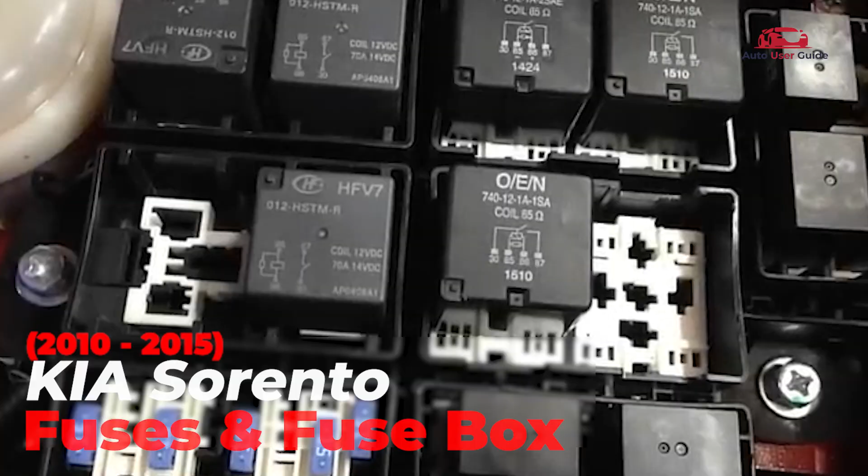Are you trying to locate the fuse box in your Kia Sorento 2010 to 2015? In this video, we're checking out all the fuse boxes from the engine compartment to the cabin area. I'll show you where they're located and explain how they keep your SUV electrical system safe and running smoothly.

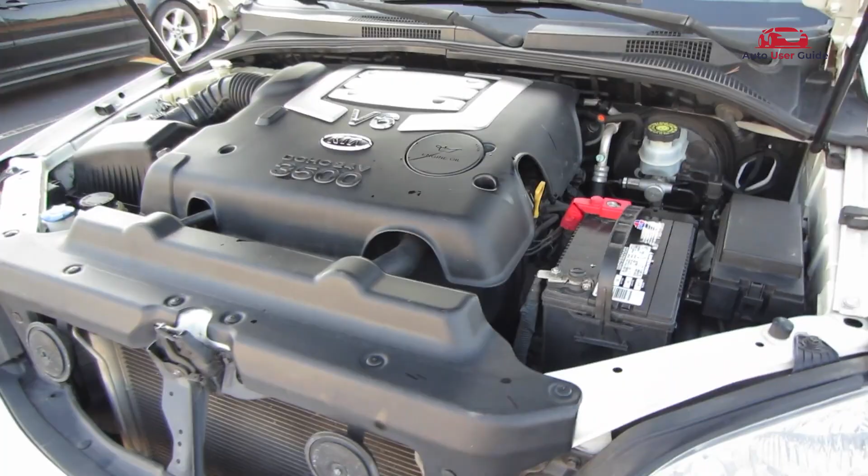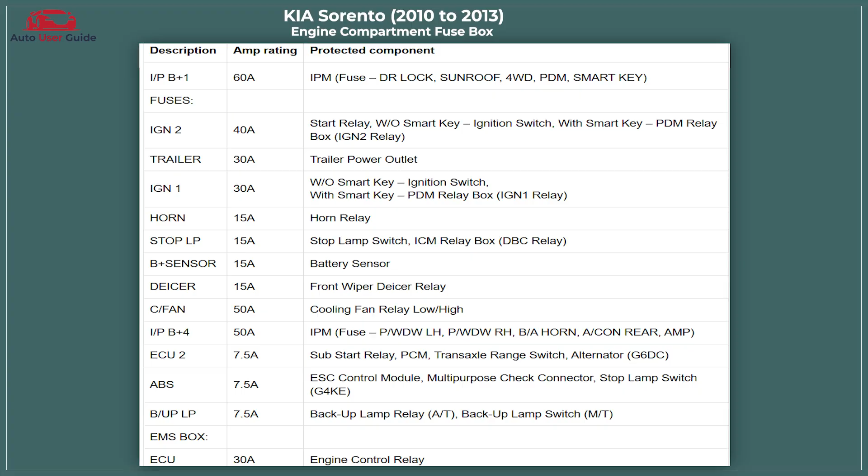Engine compartment fuse box. The engine compartment fuse box in the Kia Sorento 2010 to 2013 contains high amperage multi-fuses and standard fuses that protect vital systems like the alternator, ABS, ECU, cooling fans, and headlights.

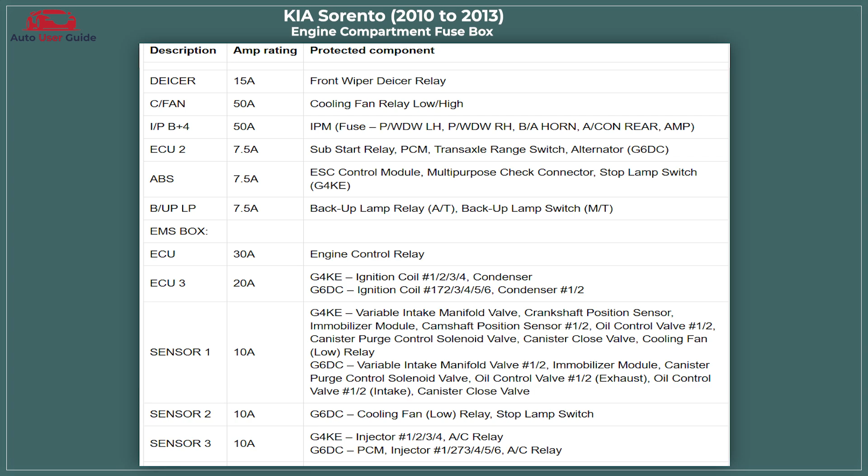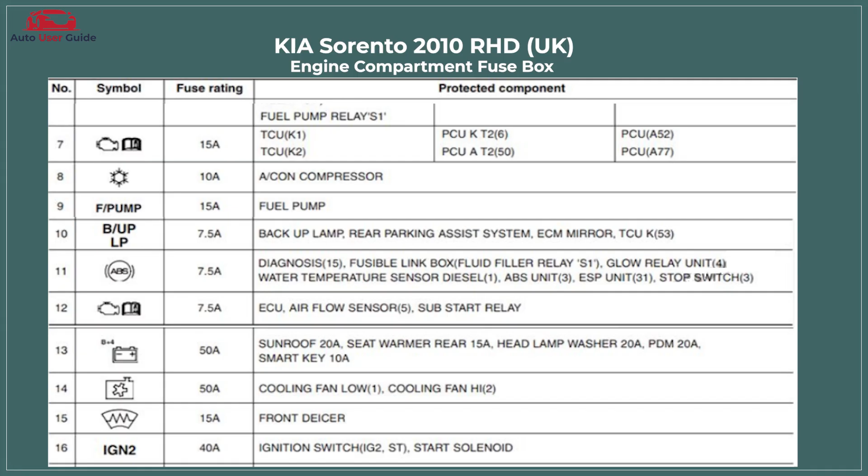In the 2010 Kia Sorento RHD UK model, the engine compartment fuse box houses multi-fuses and standard fuses that safeguard essential systems such as the alternator, ABS, ECU, cooling fans, and headlights.

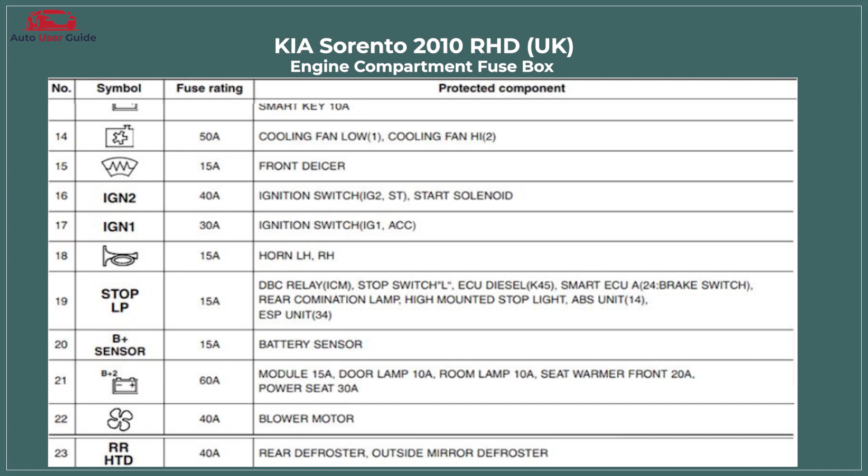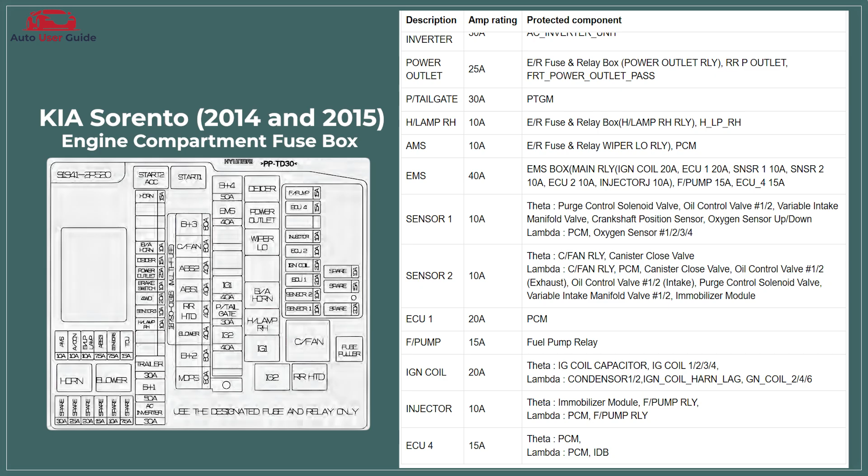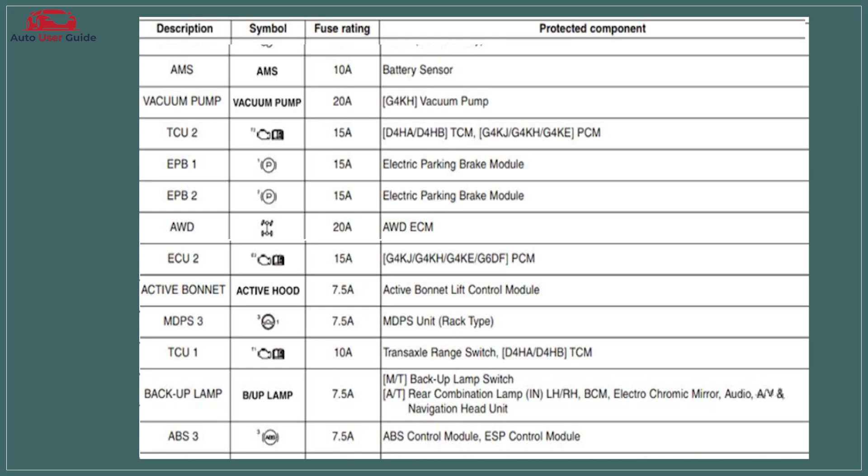In the 2015 Kia Sorento RHD UK model, the engine compartment fuse box contains multi-fuses and standard fuses that protect critical systems such as the alternator, ABS, ECU, cooling fans, and headlights.

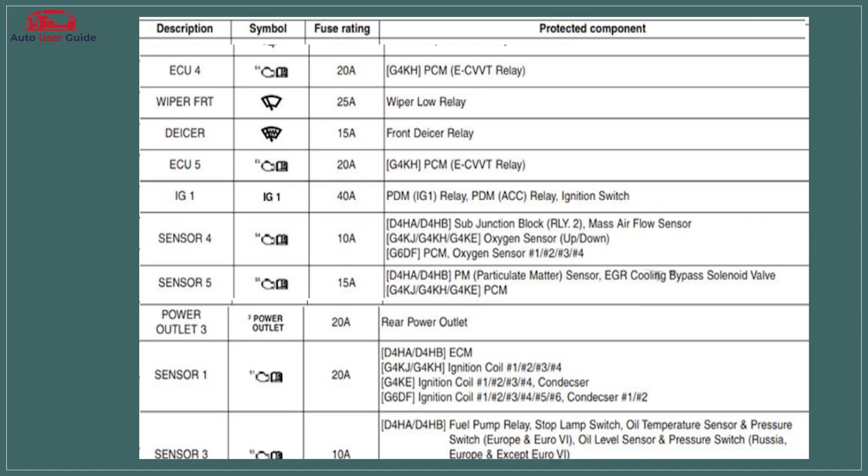In models with a diesel engine, the engine compartment fuse box is equipped with dedicated multi-fuses and standard fuses that safeguard components specific to diesel operation, such as the glow plug system, fuel heater, ECU, ABS, and cooling fans.

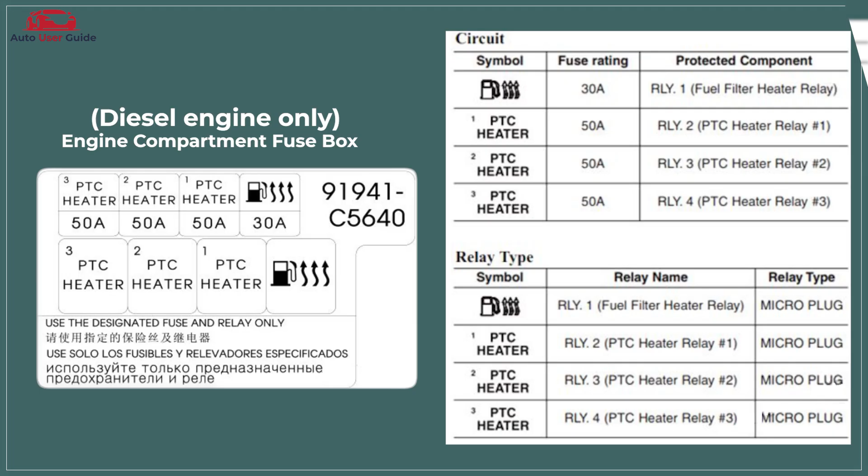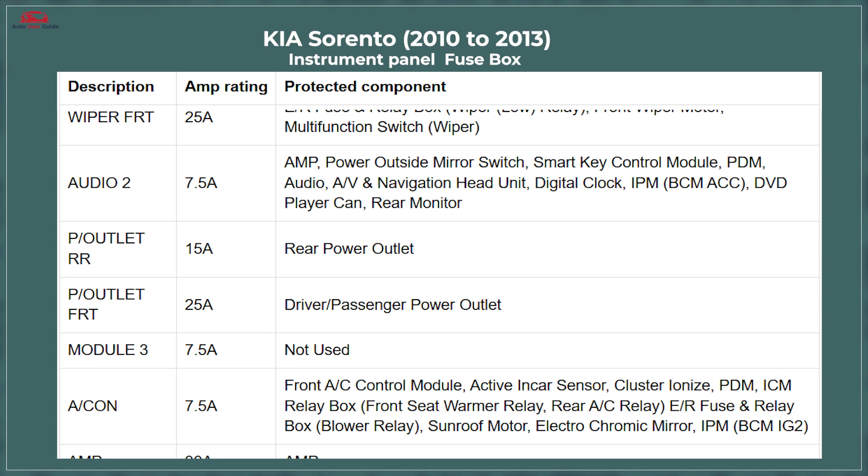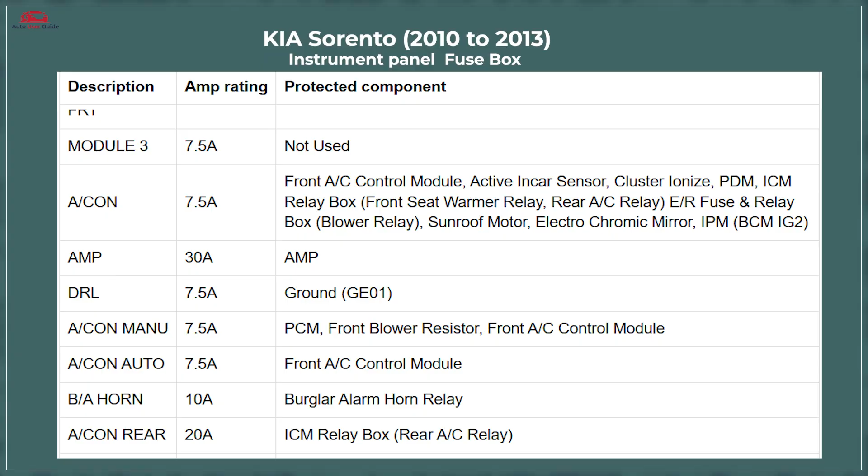Instrument panel fuse box. In the Kia Sorento 2010 to 2013, the instrument panel fuse box manages and protects in-cabin electrical systems such as the audio unit, interior lighting, power windows, mirrors, and accessory outlets.

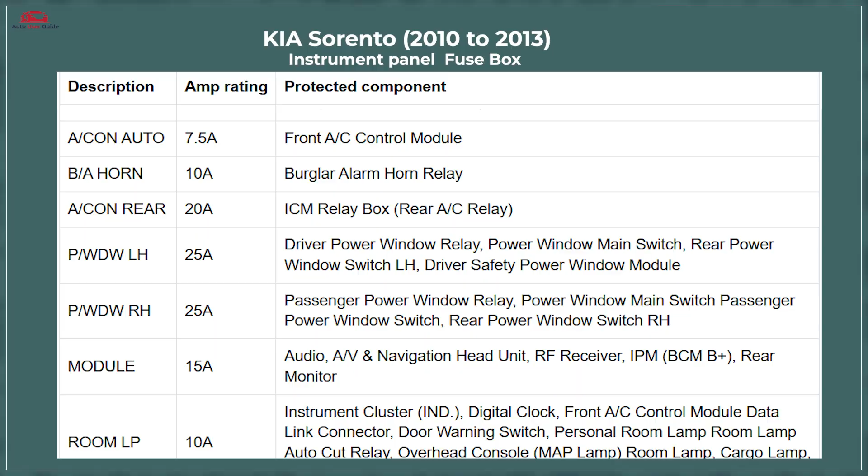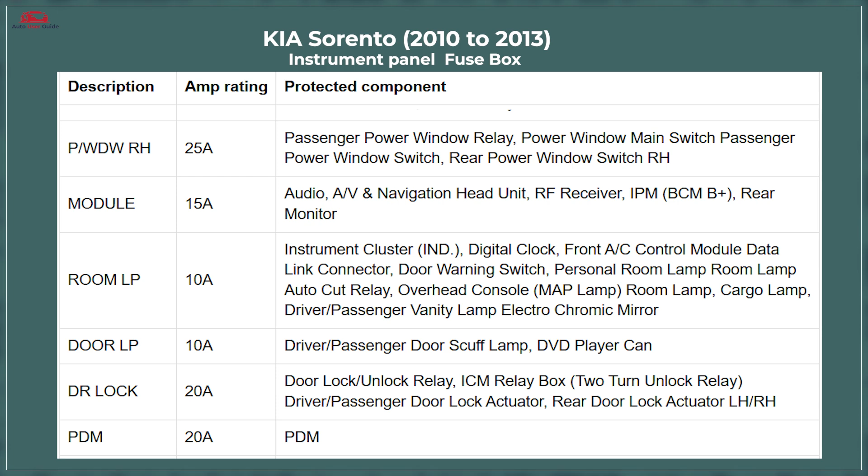In the 2010 Kia Sorento RHD UK model, the instrument panel fuse box protects and distributes power to interior systems, including the audio unit, interior lights, power windows, mirrors, and accessory outlets.

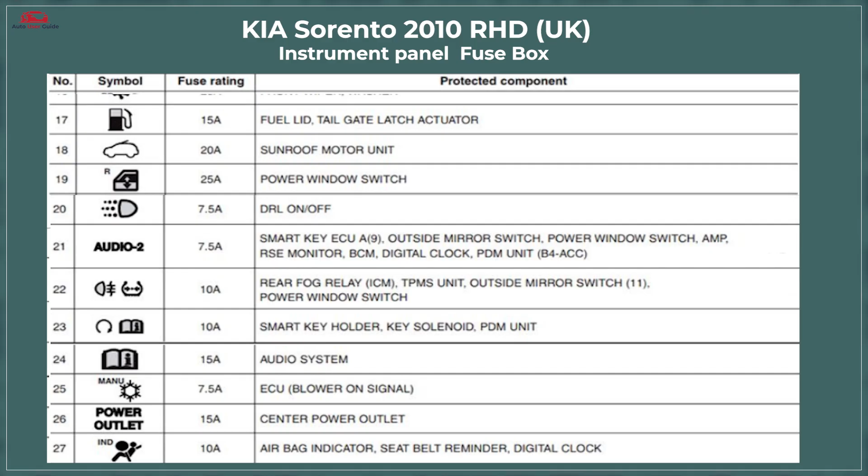In the Kia Sorento 2014 to 2015, the instrument panel fuse box controls and protects essential interior electrical functions, such as the audio system, the interior lighting, power windows, mirrors, and accessory outlets.

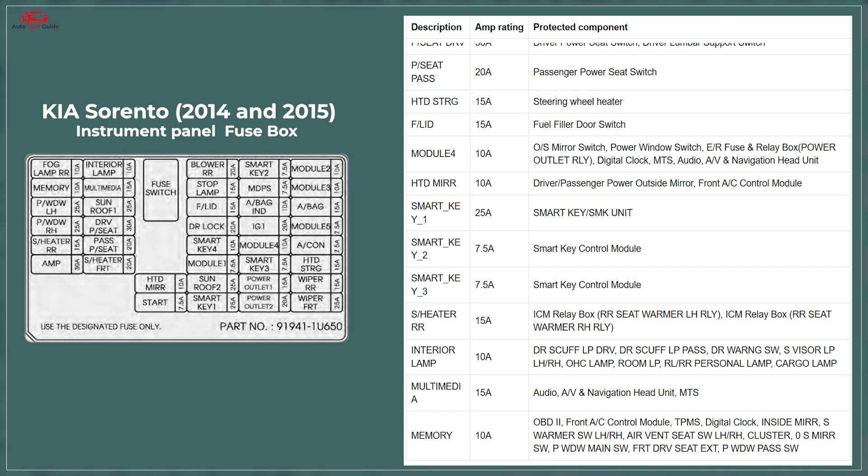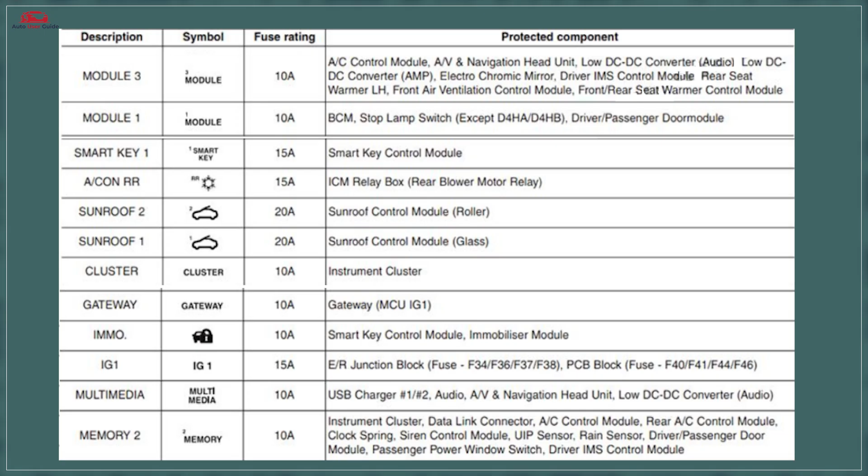In the 2015 Kia Sorento RHD UK model, the instrument panel fuse box safeguards and distributes power to interior systems such as the audio unit, interior lighting, power windows, mirrors, and accessory outlets.

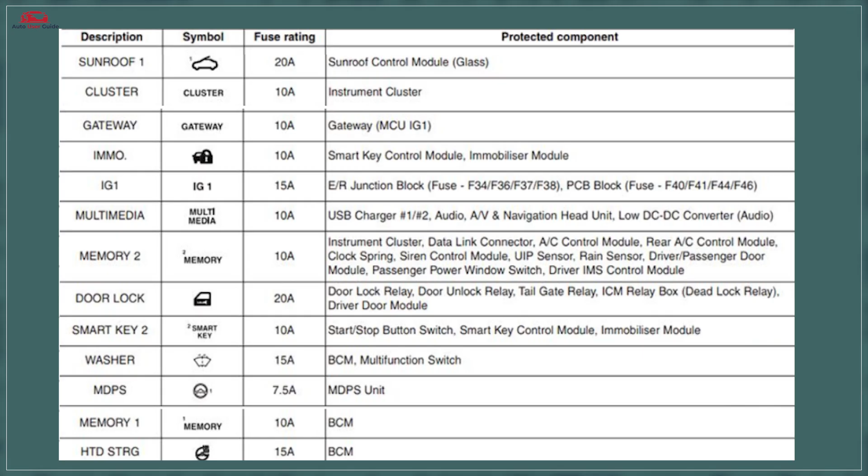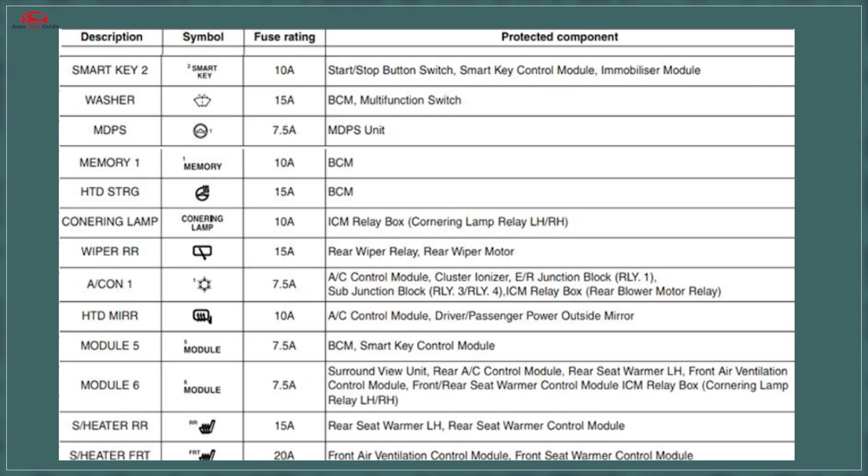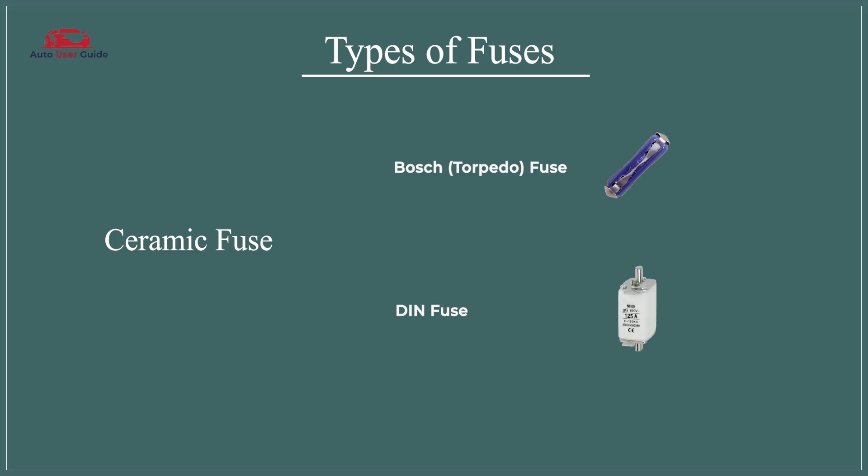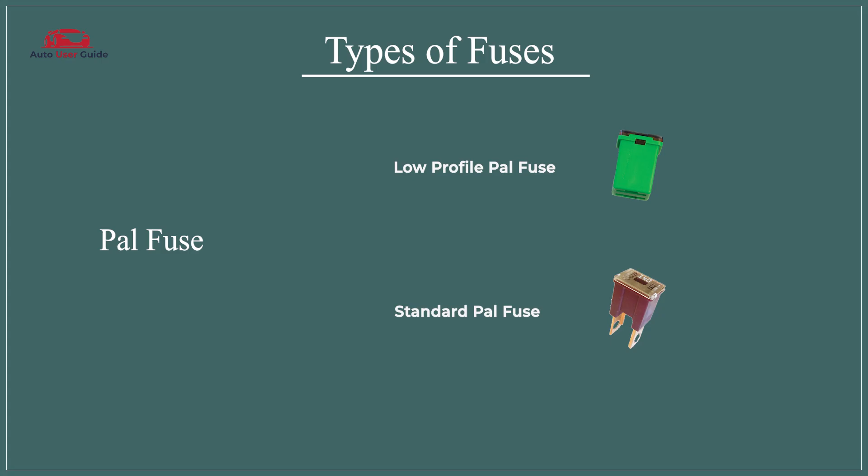Types of fuses: blade fuse, standard blade fuse, mini blade fuse, maxi blade fuse, micro 2 fuse, micro 3 fuse, J-case fuse, glass tube fuse, GC fuse, SFE fuse, ceramic fuse, Bosch fuse, DIN fuse, PAL fuse, low profile PAL fuse, standard PAL fuse, link fuse, mega fuse, high amperage link fuse.

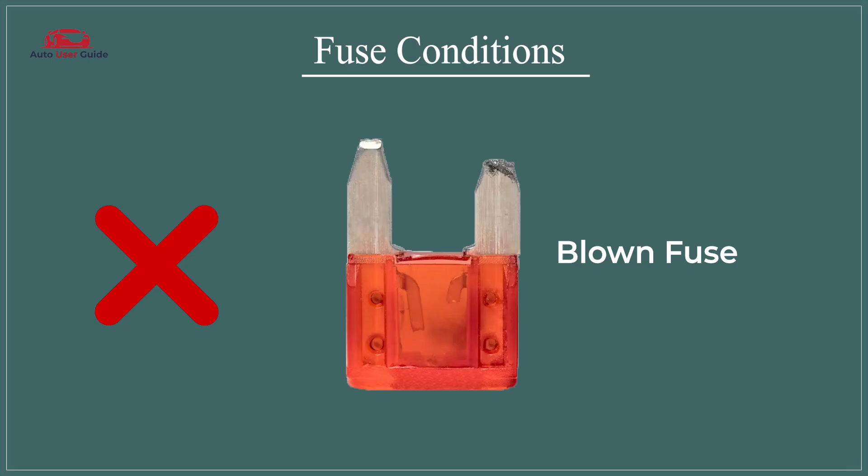Fuse conditions. Blown fuse: a blown fuse means it's no longer functioning and needs replacement, while a perfect fuse is in good working condition and performing as expected.

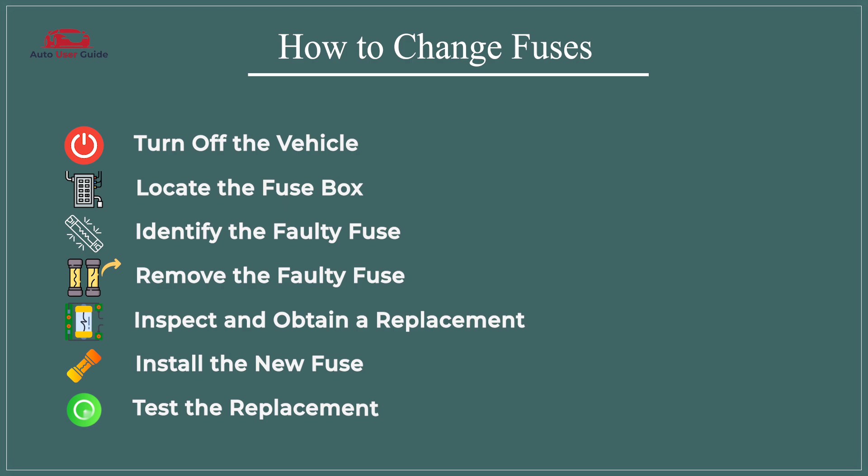Safety precautions: disconnect the battery, wear protective gear, use proper tools, check for correct amperage, avoid water exposure.